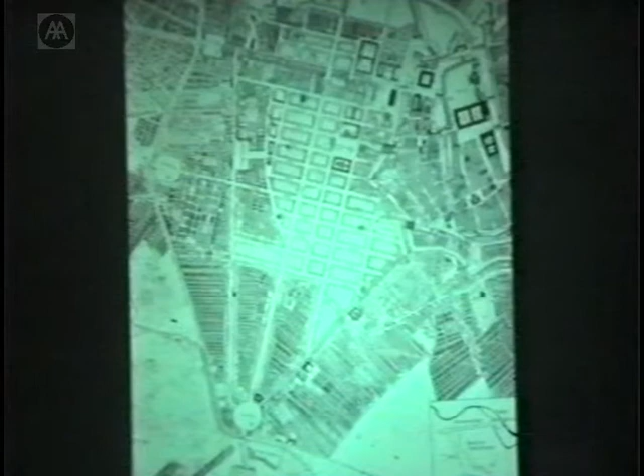Here is the southern site, a large triangular piece. Here is Lindenstrasse, which you notice has been curved from its original straightforward direction towards the Rondell in the Scharoun planning of Berlin and made to curve away from that concentration to become a kind of a highway.

That's Gerlach's building, and I should say that Gerlach was also the architect and the planner of the Rondell and of all the main geometric squares of Berlin.

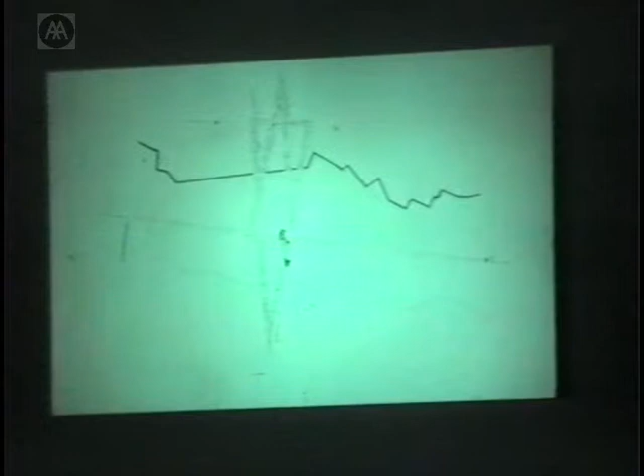That's the early model from the competition stage. In black it shows the courthouse, museum building, the zigzag, what I call the voided voids, which are the elements that have been extracted from this zigzag, and the E.T.A. Hoffmann garden. I call it the E.T.A. Hoffmann garden because E.T.A. Hoffmann was one of the lawyers in this courthouse presenting cases during the day, but as you well know, writing about a different kind of Berlin at night.

And to the south stands another important building in the plan of this museum, which is Erich Mendelsohn's metalworkers' headquarters. I propose that this shape become a garden in the future. There is here a one-story police station, so it's not certain how this will be developed. And there is the sort of three elements of the museum: the existing museum and the extension. As you see, there is no bridge connection.

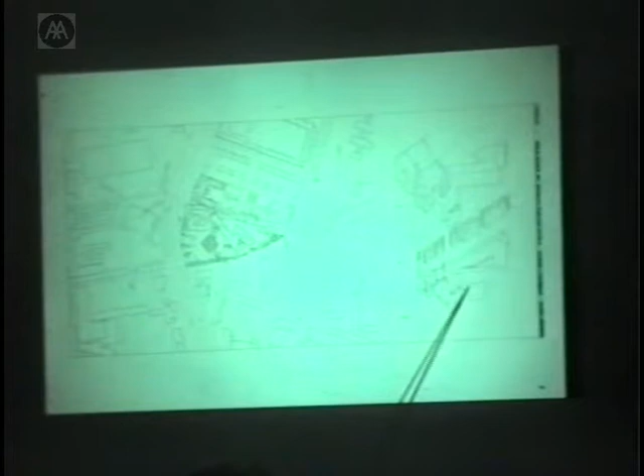And here's the underground with its kind of void placed in the building itself, leading underground to these three main axes. I said one axis leading to this dead end, the Holocaust tower, the other one leading to the Garden of Emigration, and the third, longest one, leading to the center of the building, which is the main stair and circulation system.

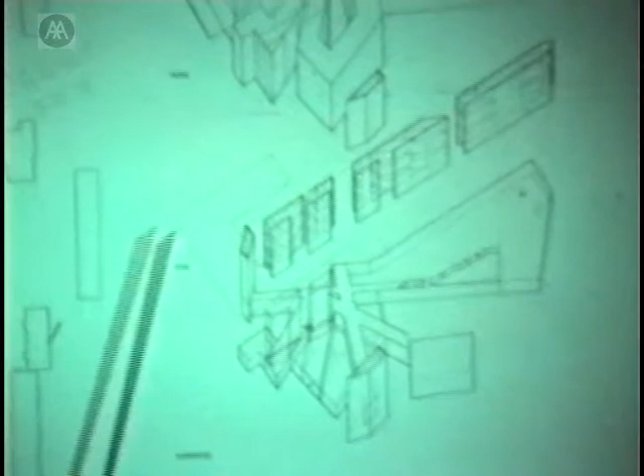I just want to say that the building has a kind of a doubling effect. From the outside, it looks very, very simple and has a narrative beginning and an end, thin and thick, and it's very, very strong and very easy to understand. But from the inside, it's completely different.

It's actually a building which is hard to contain and keep together as one building because it is connected by this slice which one does not see, since it is not a slice upon which you enter. It's not even a slice upon which you leave. It's that element of imaginary organization, which of course is there also physically.

And the building therefore has a very vulnerable organization on the inside, while it has a very simple and easy to understand organization on the outside.

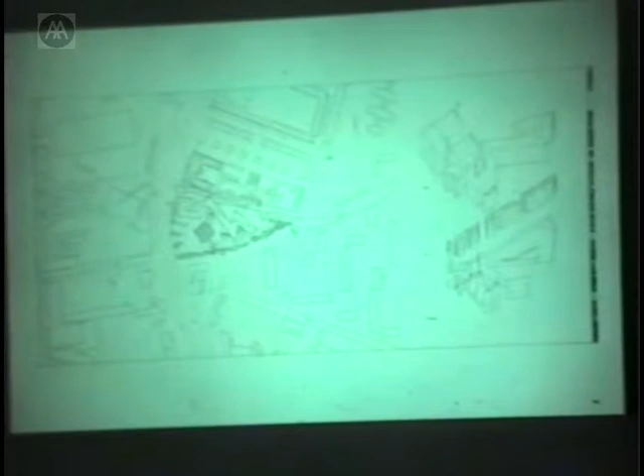And of course this is part of my own interpretation of Berlin history, that from the outside it looks very graphic, like it's something very tangible, but as you go into it and as the light dims on that history, one finds it more and more difficult to really find the pieces which belong together. And of course, the pieces which belong together are the pieces of the Berlin culture, which we can hardly find today because no artifact can tell us somehow how these conditions of life were mirrored in the city of Berlin.

So it is really a museum for the participant. It involves the participant in a particular way to reinterpret the history rather than to simply be a passive observer of archaeology.

This is a site plan of the museum. I just want to show again Mendelsohn's building here, the 19th century building, the housing projects east and west, the IBA buildings to the north, and the flower market, and so on.

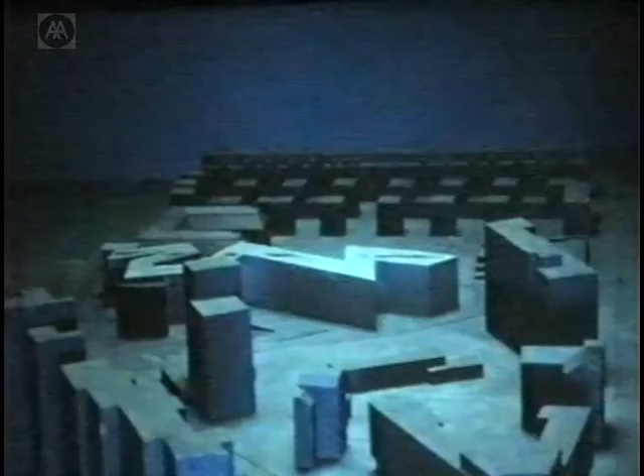View looking from approximately where the Rondell was. Today it has been totally built up by housing areas. And that is also an early model of the building.

I just want to point that the building is really many different buildings of many different shapes. There are buildings of this shape and buildings of this shape, and there's another one here, and there's a building like that, and there is a very small triangular building.

There are a number of independent buildings which are connected by that double wall of the void. And here are the bridges on different levels, and so on.

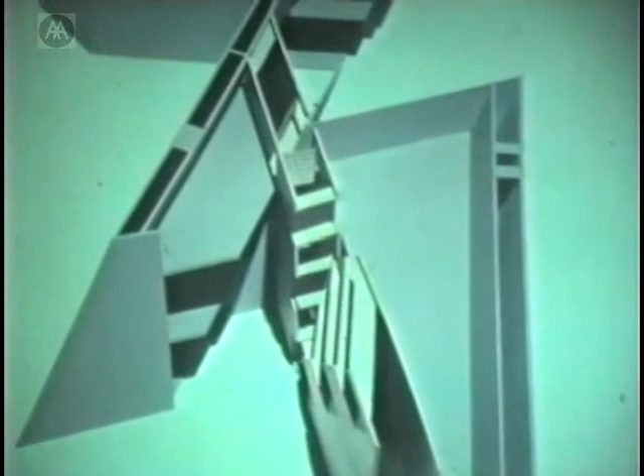That too is an important part of the building, that the void gives the building a kind of a backbone in order to turn the building into a fragmentation of many different buildings, each one having some relationship to, I would say, Berlin, both in its exterior and interior space, from sort of tenement kinds of buildings to large housing projects towards the east.

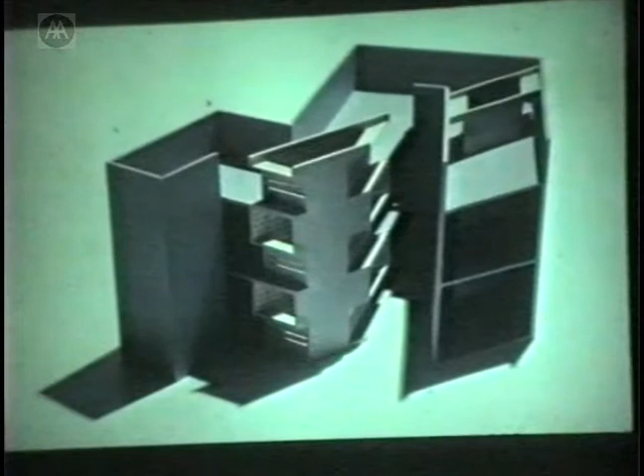And that, for example, is the first segment of that sequence of development, the first piece of that zigzag. And you see here along its upper levels, there's of course the underground, which is not shown in this model, but here is a small triangular building, here is the rest of the museum, here is the bridges on all levels, and here is the void.

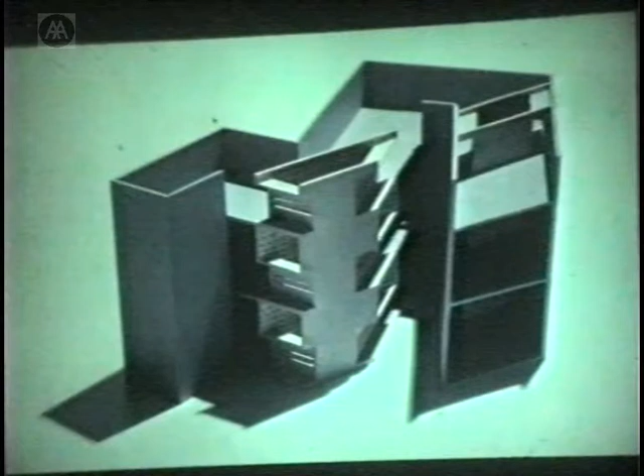And here is the second void, and so on. And the museum continues in this manner, but always from the middle, not from the beginning, because if you remember, you enter the building in the middle. You don't enter at the beginning or the end. You enter in the middle, and you have by that time traversed a large underground space.

That is the underground. I'm sorry, the slide doesn't seem to be very good, but you see the southern wing of the Baroque building. You see there a bit of that void in that building, and this is the main line of circulation. That's the beginning of the staircase.

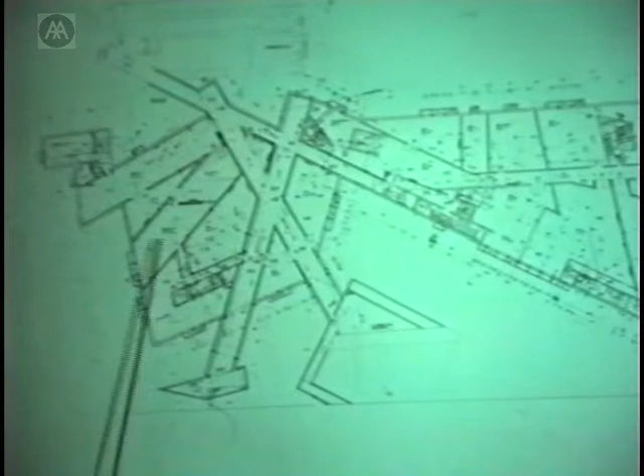The garden, the voided void, the religious collections of the Jewish community in Berlin will be shown in the underground. There was a very ancient community, one of the oldest in Berlin, here. There are other facilities in the underground, other bits of the museum, also storage and other parts, which are also accessible to the public in part.

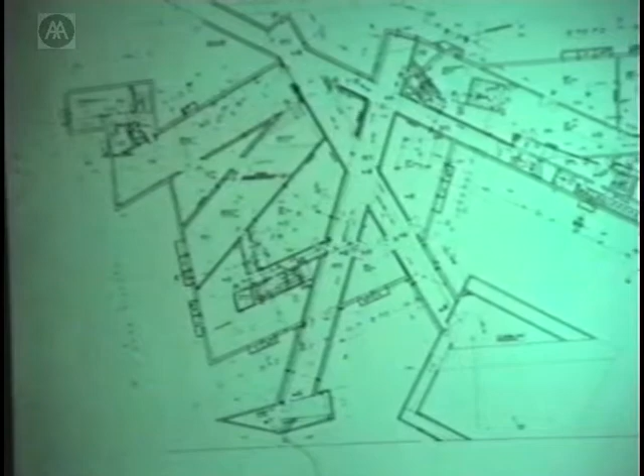That's the underground. Now I have to show you a number of different kinds of things because I have found that it is not an easy project to explain, because it's one of those projects where the plan has no relationship to the spatial experience. I want to emphasize this. Usually plans in architecture are simply projected into the spatial experience. In this case, because the approach is thoroughly emblematic, the actual plan doesn't really give you what you will feel.

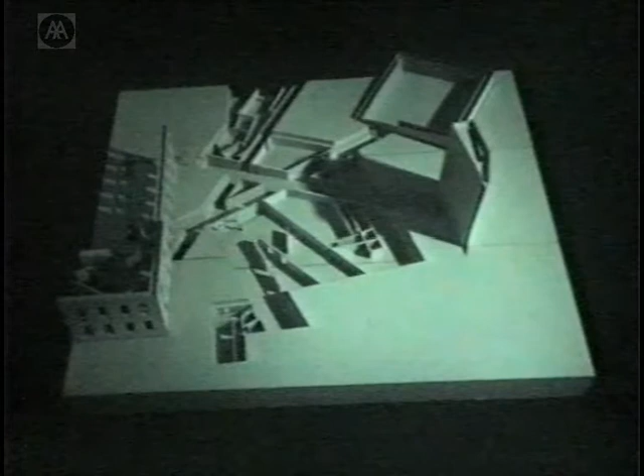Therefore I have made maybe more than 60 or 70 different models, site models at 1 to 200, 1 to 500, to actually a one-to-one piece of the void and piece of the underground, which was recently built in the Berlin Museum as a kind of experiment to test materials. So please bear with me if it's not completely transparent.

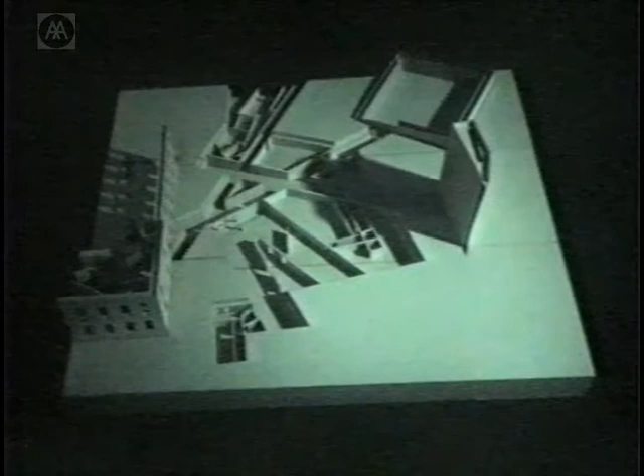That's the underground. The entrance, the main entrance of the Baroque building. Here you go down. You go actually underneath the foundations of the Baroque building. And as you perhaps know, the buildings in Berlin are built on water. There's a lot of water, sand and water.

And here when you go down, you see that you kind of see the geology of Berlin. You see that it's really floating. And you go underneath this foundation very deep, 8 meters down, and you come through this axial system. There is that religious collection.

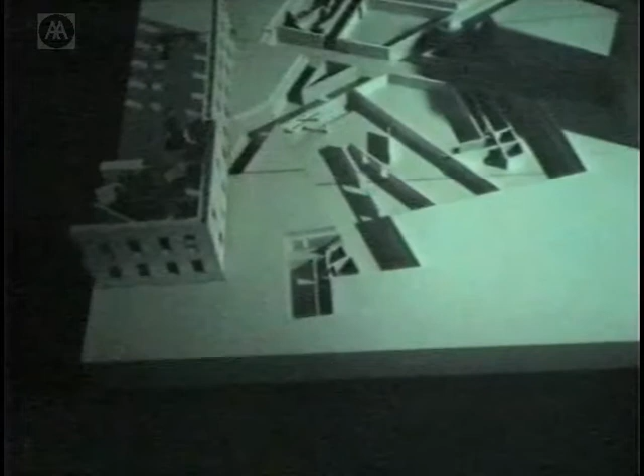And I have to say that on the underground, the zigzag breaks itself into pure forms. I call it the buried constructivism of Berlin. Because here on the underground, the zigzag can actually be experienced as a set of pure volumes, just lines, which upstairs are connected, and therefore one doesn't see those pure elements any longer. So they are experienceable as pure lines in this hidden zone.

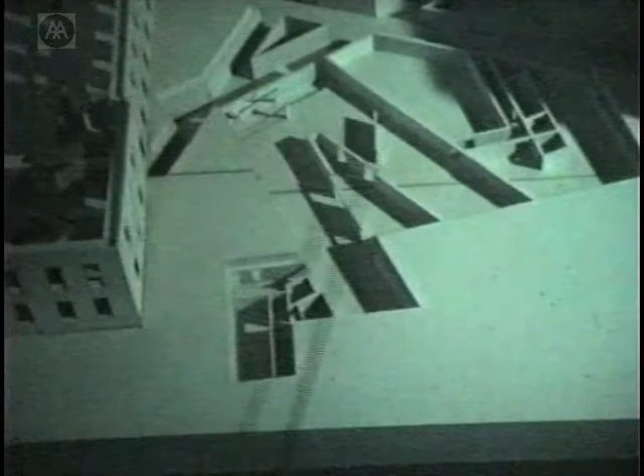And here are the traces of the voids which go all the way up about 22 meters high, and the axis. And there at the top of the slide would be the beginning of the main staircase. And that tilted form is the garden, the E.T.A. Hoffmann garden.

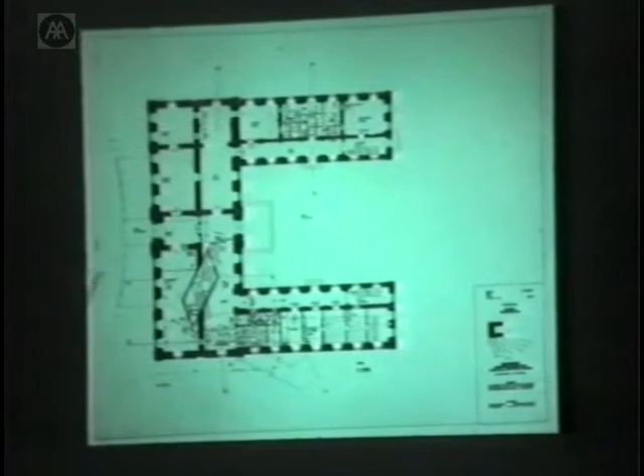The Berlin Museum at present with this form, the entrance. That was, by the way, programmatically part of the program to make the Berlin Museum, to restore it as much as possible to become an important building.

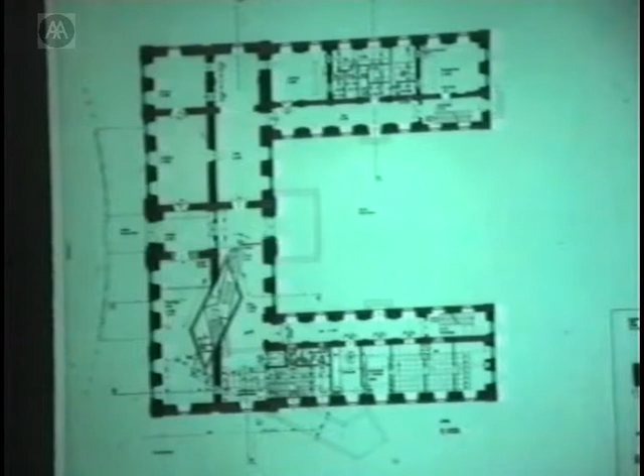And I actually proposed to restore its symmetry, although I inserted this large form into it. But it was reconstructed after the war in a not symmetrical way, and I proposed to reconstruct it close to what it was.

Going down and in section, you can see here, you would be able to view this level here. And at this point begins that labyrinth.

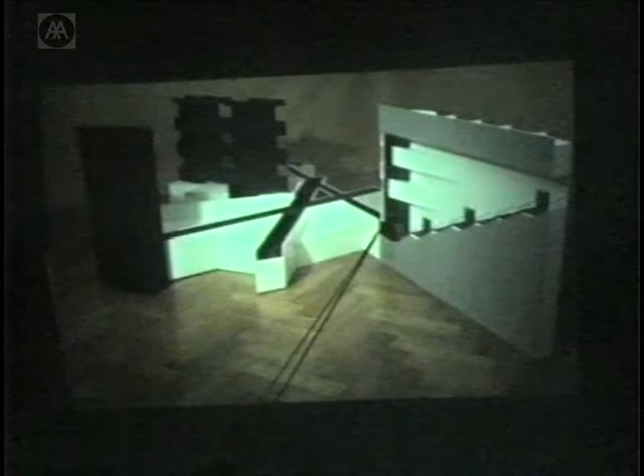Okay, going down. And that's another model just to give you a relationship of these voids in the underground to the main circulation system, which is here. That's, if you can imagine the zigzag going like that, that's the middle of the zigzag, and it keeps going this way. And that's the exact geometric middle of it, where you are on the staircase, and there are the different exhibition levels.

Here is a construction of the two voids, and the reversal of that void, you can see this is the positive form of this negative absence. The one going here, the one going here, and the garden would be here.

There you perhaps see clearly the religious collections, or whatever remains of them. Actually, what remains of them is very little. Don't think of religious collections as being some fabulous museum of artifacts. It's just a few menorahs and really things that would never give you the idea that almost 200,000 people, very actively involved in the city, actually were part of the city.

So it's not so much about the object, it's about, in this particular section, the display actually of the tombstones which were extracted from building a U-Bahn station in the 30s. They actually have been preserved, and I found them, and that's part of this museum.

And here you can see the scale of these voids, and there are 6 of them in the museum, and they are different in size, length, but always the same in height. And you can see the bridges, which you would experience.

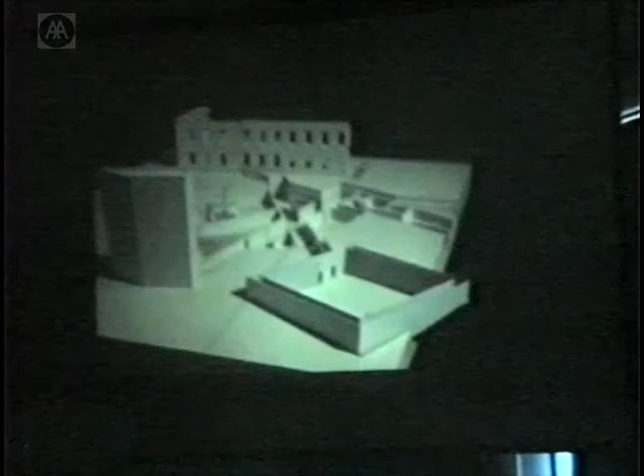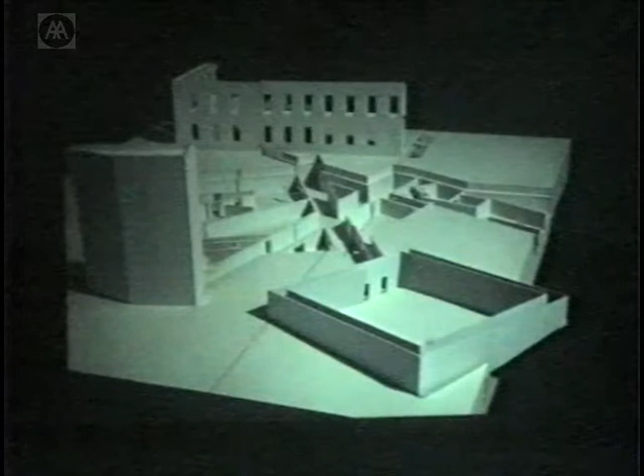Yes, maybe this is easier. That's a view from the south, looking towards that underground. I would say almost a third of the building, at least in cost proportions, is underground. It's difficult to build underground, but this building has a very vast foundation. On the outside it looks fairly thin, but on the bottom it's substantial.

This is what you would see when you had gone a little way into this axial, into this kind of triangle. Here is that main stair. Here is the axis towards the garden, and here you see the lighting system reflecting that longer axis, which leads

to the dead end. Programmatically it's important to know that there is a kind of order here, but it's an order one must find, because it's also conceivable that some people, seeing the light of the garden, will move towards it as the main space, when it's really just out again of the building. Others might take the transversal axis, which leads to a volume, and still others might take the staircase itself.

I've tried to minimize any disorientation in the building. However, I have to say there is an element of vulnerability in this building. It's not all given in plan, and even if one would give it in plan, I think people would still sometimes return, sometimes involuntarily, into the system of geometry.

That's just to show you where the photograph was taken, approximately from this point here. This axis is still going back there, and we were looking at this, and the lighting of this axis here, and at a bit of this frontal part.

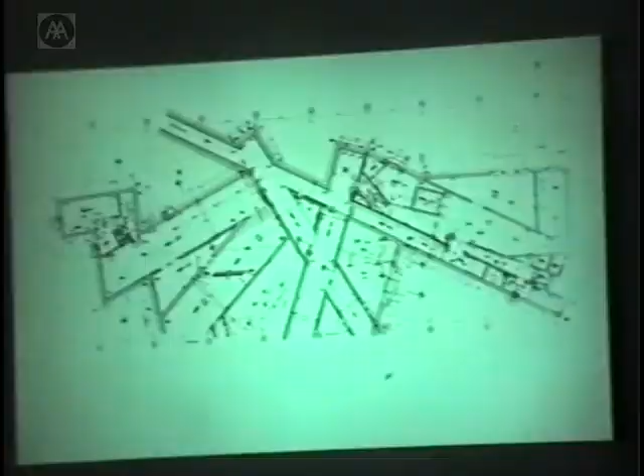That's another axis, and on the right is the opening to the Jewish Museum. When you enter this museum underground, you see partly here the void, that black line. The void is actually accessible in two places in the museum, in the two underground spaces of the religious part of the collections.

There, and it's the only time, you can see the full organization of that volume. Everywhere else there are slits and cutouts, but one can hardly look into a dark mass and know what it is geometrically. The material of it is graphite, so it absorbs light.

Even the names which are in it are not really completely legible, because you can't read that many names. I was interested to find out how much those thousands of pages of volumes would take up if you were to just cut out the pages—an incredible amount of volume. These two volumes, approximately this thick, don't even fill two 22-meter high volumes, which are sometimes 10 meters wide.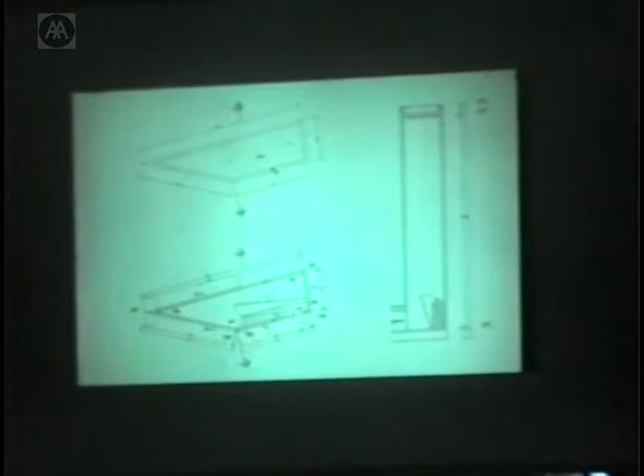That's that void. And we entered through here. Through here. The stair.

And now looking from the opposite side of the garden. And now the garden is these pillars, these 48 pillars of salt. But they are not made out of salt. But they relate to the mines of Falun as they relate to Jerusalem. And they are proposed to be built in this gray-white stone from Jerusalem.

It's a kind of a very full building volume which confronts you on a very oblique angle as you leave the museum from that particular route. And here you perhaps sense the kind of space. It's a labyrinth without any interior to it.

And here we rejoin again the access towards the main staircase, getting closer to it in plan to the center of the building. And now you're up on the staircase, and there are these levels, the temporary exhibitions level, which will house temporary exhibits of the Berlin Museum, and the other two levels of the museum. And upstairs is an administrative level which contains reading rooms, archives, and offices.

In section, the main entrance to the building, the entrance to the underground, this tilted plane, and I have in no way to explain this, but this entire trigonometry of these axes lies on an oblique plane, which is very, very disturbing. It's not oblique by a lot, it's only a few degrees, but you really feel, I think, and as I explained, we have just built part of it at 1-to-1 scale, approximately the size of this room.

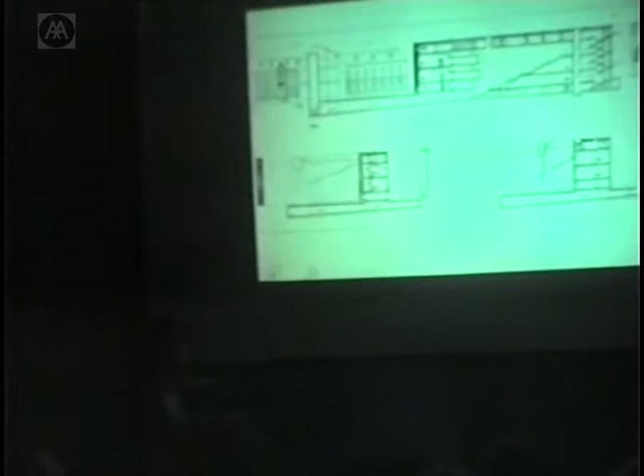And it verifies, I think, what I tried to do, which is to embody in it a thought of Franz Kafka, which is that the most dangerous space is not the space which is high up, but the space which is approximately 4 centimeters from your foot. And he says that's the space which really trips all concepts. And I thought that this plane, it's about a 4 centimeter slope, gets you to these voids here.

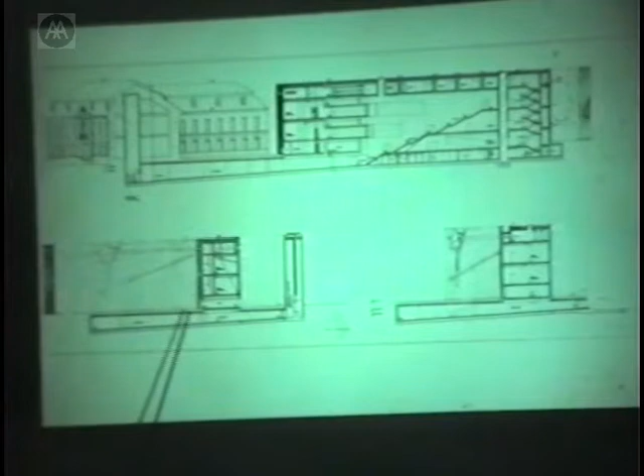And here you see in elevation, in the cutouts, those recordings of what I call the intermarriage of Berlin. And of course the marriage, I don't mean it just in an alchemical sense, but the marriage, the intermarriage between Jews who thought they were Germans and Germans who thought they were Jews, is part of the essential ambiguity and tragedy of the history of that city, and of this city, of any city, but particularly Berlin.

And this assimilation is constituted in the lighting system of the windows. So what appears maybe a little bit crazy from the outside is a very important, at least to me, principle of organizing and making sense out of vanished relationships and vanished physical ambience, which you cannot see by the window or by looking at a monument or a street.

That's the stair, and I want to say that only where the main orientation occurs at the stair do you actually see the contradiction between such a void and such a continuity.

Can I press the next slide? Yeah. Can I press the next slide, or? Did that slide not want to be? I'm sure there is a slide. Okay, but don't worry about it. I can just skip it. So shall I? Fine.

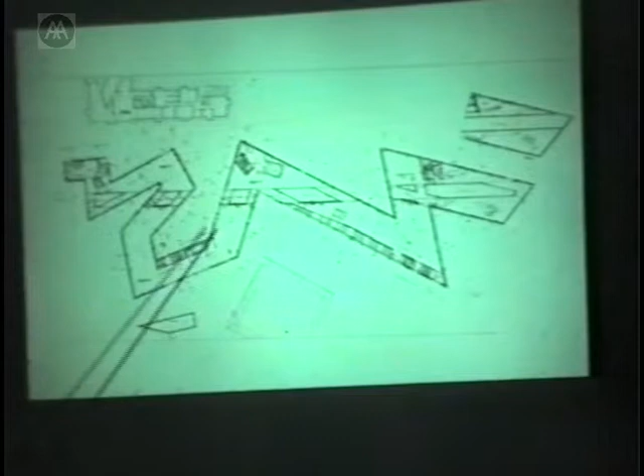It's a typical museum floor. Elevators, staircases, and so on are basically freestanding objects within this. That's the line of circulation. The other, just to see what that void looks like in another plan, and so on.

And that's what it looks like. That's one part of it, that middle portion. I just want to illustrate what it looks like spatially with its elevators.

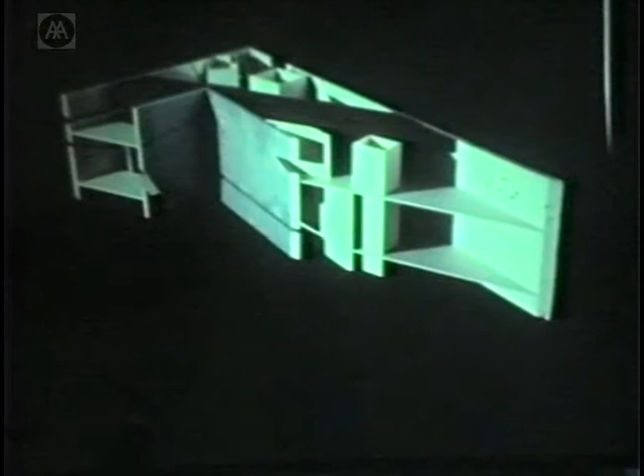You can see that this double wall has a very big impact on the building because, first of all, the entrances to this double wall, which is the wall of the void, are always symmetrical. It's the only place in the building where there is a left and a right. Whenever you come to it, you have a left and a right, and you have a kind of continuity in the form of a mirror.

And the rest of the museum spaces always have one blank wall, at least, and one angle. I thought programmatically that these conditions of looking at the Berlin history from an angle towards a wall which is symmetrical were important. So in each space, you're always looking from an angle of some shape towards a symmetrical entrance-exit situation.

I should probably describe that this is not a concept that is just whimsical, but has to do with what kind of exhibits this museum has. This is not an art museum, not the Museum of Paris or London, not a museum of a normal city. This is a museum of a city which has the most amazing and schizoid, hysterical history, which cannot be shown in any other simple way, but I believe by putting the museum goer exactly into those conditions without simulating them.

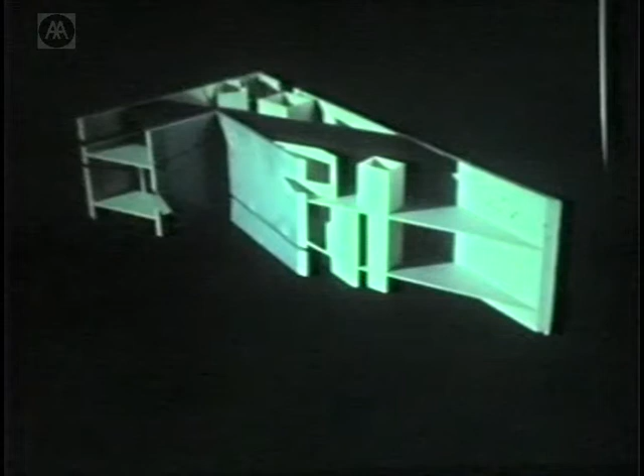So, for example, if one was to display a painting by Max Liebermann on one side of the void, on the other side of that same wall, on the inside of it so to speak, one would see the suicide note of his wife, written from a concentration camp in 1940. If one was to show the books of Walter Benjamin on one side, then one would show the missing manuscript of Walter Benjamin's, which he lost somewhere in Spain.

If one was to show Schoenberg's notes for Moses and Aaron, one would have to show on the other side of that music the survivor from Warsaw. So all of this doubling has to do with the fact that I believe no Solomon can actually divide the Berliner into a German and a Jew, since it's not possible to divide them along any line of geometry. They have coagulated and therefore can only be separated through negativity.

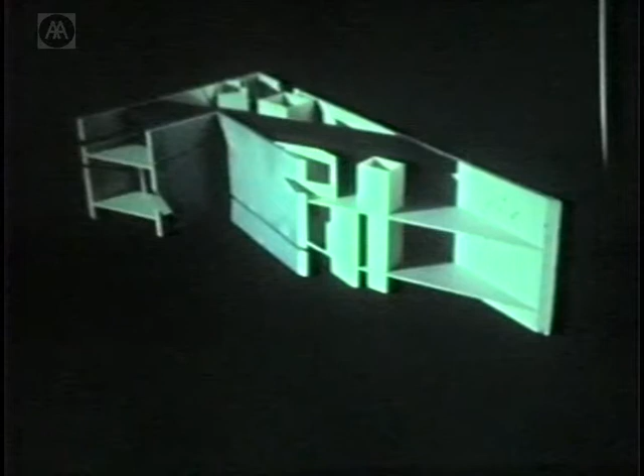Of course, one can say that Walter Benjamin becomes a Jew and is no longer a Berliner when he gives the manuscript up and commits suicide, that Max Liebermann is no longer the head of the academy when his wife begs for permission out of a concentration camp, or where Arnold Schoenberg renounces his conversion to Protestantism and becomes a Jew once again.

That's really the mission of such a museum: how to show a history in an integrated manner, not in a segregated manner, not in a manner which would put the Jewish Museum somewhere as an ethnographic museum of a missing people, of a lost people, but would show the continuity of that history and the power of that history within the emptiness of the contemporary state.

And of course, that is just a small aside to why the museum has this particular set of organs. That's just a walk between two voids along the porcelain line. And that's the porcelain Hof, the porcelain courtyard.

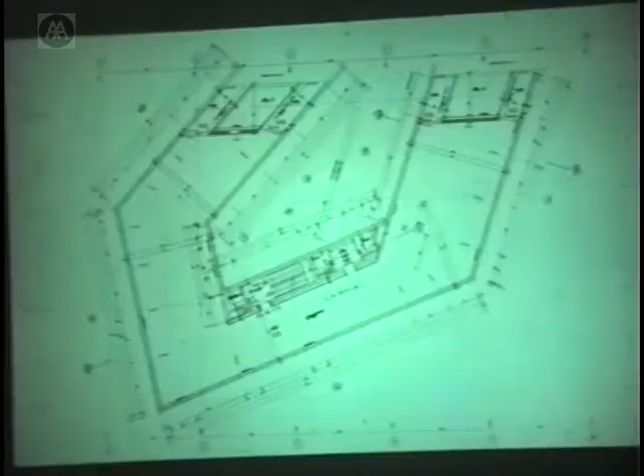I would just like to show you what it would feel like in this particular segment of the building. That's the first piece along that line. Second piece, you go around. Third one, you become aware of the void, or of the wall, the black wall in the back of this white museum. The museum is in three colors: black, white, and gray, basically.

Then you get closer to it. Well, something is wrong with this. But can I just go on? Yeah, there was one more. Now, can you go back to that section? No, don't worry about putting the slide back.

That slide which was missing, which somehow is not wanting to project itself, is the slide where you would get the symmetry of the doorways on that black wall, where you would get a complete, very simple left and right, which is a kind of the geometry of the return. And here is the return as it appears in sections.

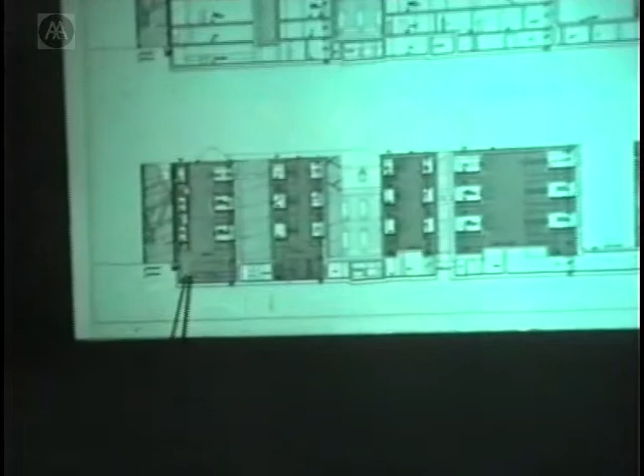These are what I would call these other kinds of buildings, these black buildings, which are also structurally supporting those other shapes. So 1, 2, 3, 4, 5. These buildings, I wouldn't say they are negative buildings, but are actually the positive sustaining of those apparently eccentric geometries. And these are the bridges in section.

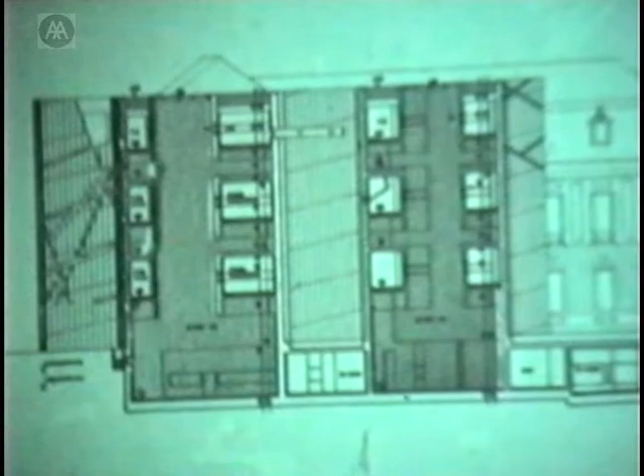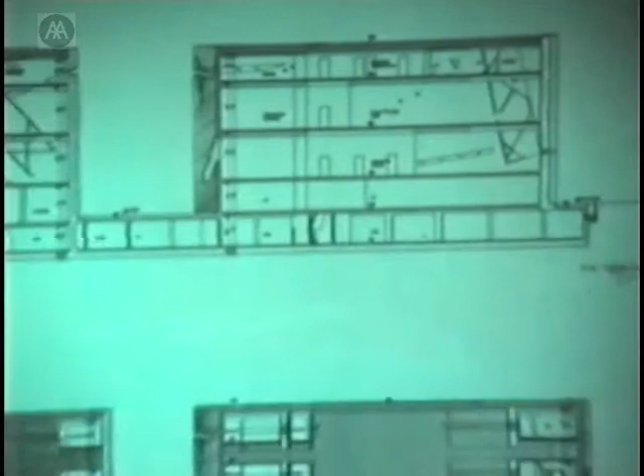The numerical and numerological aspect is very important in this museum. I don't have time to go into it, but I did try to interpret both Walter Benjamin and Schoenberg in a certain numerical emblematic tradition. That's why the museum has 24 elevations, 177 windows, and so on. Some people ask whether everybody will know about it—probably not. But that wouldn't invalidate the fact that I sought to make the museum an interpreter of these texts rather than be interpreted by them.

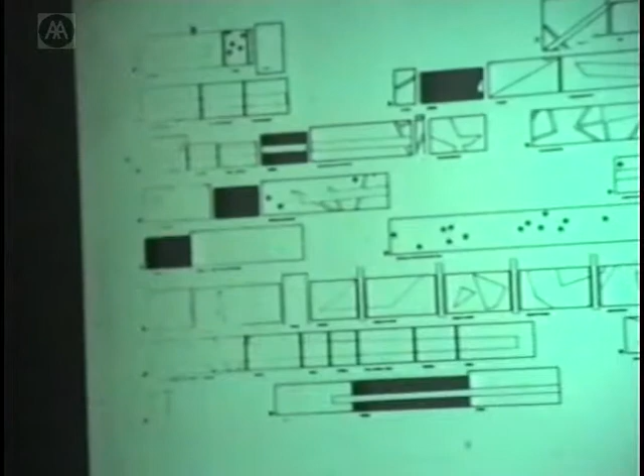That's, for example, how on the administrative level the rhythm of void, window, and blank wall would look. That's just a portion—I have many of these drawings which I don't want to bore you with. That's the last void, void number 6. It's the longest one, and again it's accessible in a different way from the first two, from the temporary exhibitions area.

Here I think you see that it's really a building in itself of some substance and some cost. This is an important factor, because who wants to pay for a void? When it comes to money and budgets, the most important thing is to convince somebody to pay for nothing. But I have to say I got my courage to do this.

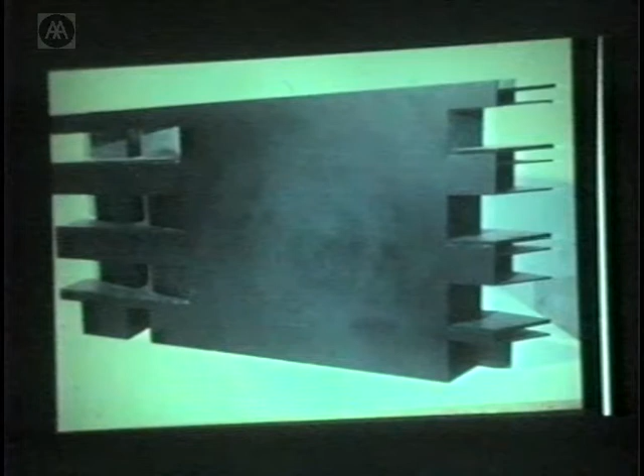I would never have been able to do it without my wife Nina, who helped in the political argumentation. But I have to say Wittgenstein gave a very good example of it. He said that nothing is not really nothing—it's a word. And the minute it's a word, you can use it as a linguistic piece of analysis. So I used the same logic.

I said the void is not really nothing, because of course the Senate of Berlin said the void costs so many millions. It's all this cubic volume of space which is being built, and no one will ever know it's there—it will be just as much of a void if you compress it and make it into nothing, just call it a void. But I said no. Arguing in a Wittgensteinian manner, I said that in architecture, the analysis of that physicality would really show it's not nothing—it's really a third of the architecture.

And I was lucky that people in Berlin also understood that this is not a conceptual museum.

That's how it would look passing across one of the bridges, one of the many, many bridges. They're all different—if you looked at the plan, they have different shapes and different lengths.

This is a slot, a cut of space. I also added a small cut on the bottom for kids and for people who cannot view it at that level. It's interesting what you would see, because I cannot describe it exactly, and I don't have a successful photograph of the one-to-one model, but you see something that looks like it's not there, but looks very far away from you. That's the impact, because it's in fact very close.

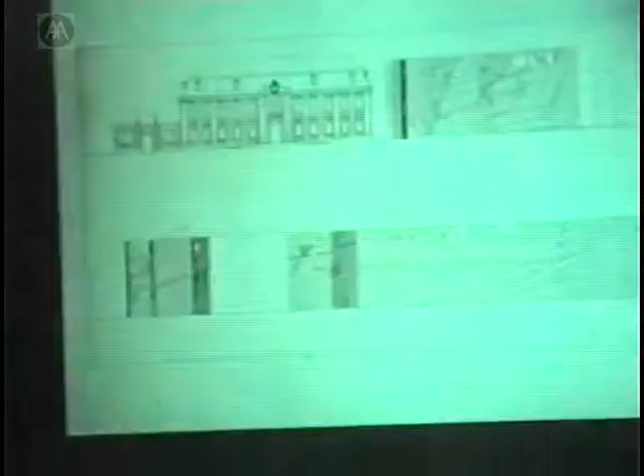And that's the elevations. This is the elevation looking from Lindenstrasse on the upper side, and elevation looking at the voided void here from the south, from the Mendelssohn building, so to speak. And the cuts, angles of the different parts of the building.

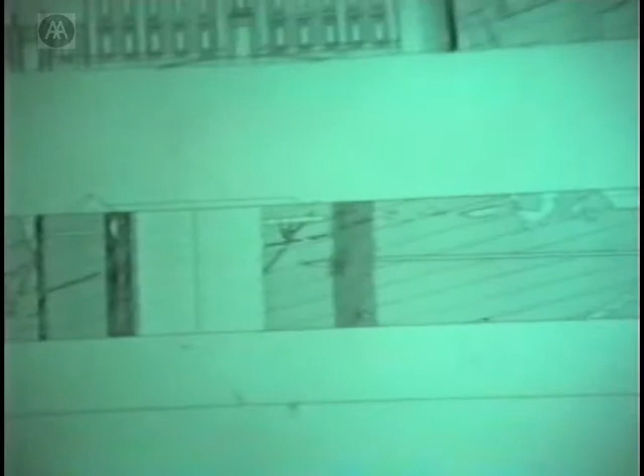I should mention that this line of absence, or line of inaccess, traverses all different exhibits, because the museum is not only a painting museum—it has large collections, the largest collection in Berlin of textile and fashion. The garment industry was one of the biggest businesses of Berlin; before the war, many of the leading protagonists were Jewish businessmen and Jewish tailors. There is also a large theater and cinema collection, which includes paraphernalia, manuscripts, and so on. There are toys, articles of everyday life. It's a mixed, very strange museum, because it's itself a product of an accident of what survived.

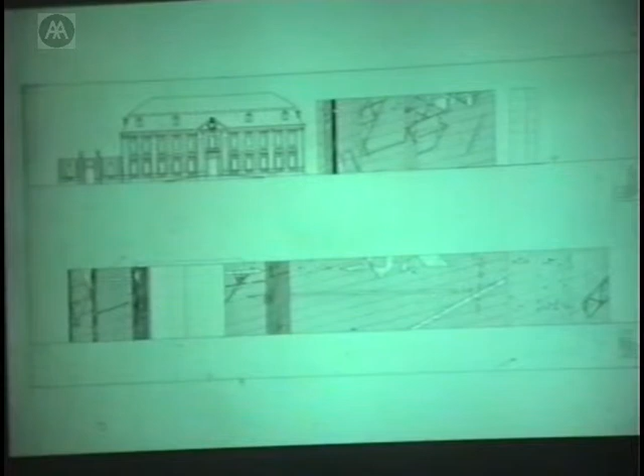These are the elevations from the east and from the north, again marking this invisible interconnection of basically names and numbers.

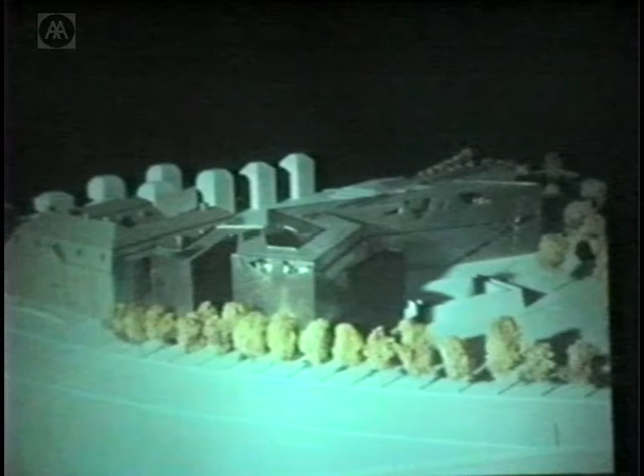And that's a view from Lindenstrasse, with the IBA buildings in the north, and these are the existing trees which have all been kept. I've kept as many trees as possible within this configuration, because it's part of a kind of green zone for pedestrians and bicycles, connecting Kreuzberg and other parts of Berlin. It's a view from the housing complexes.

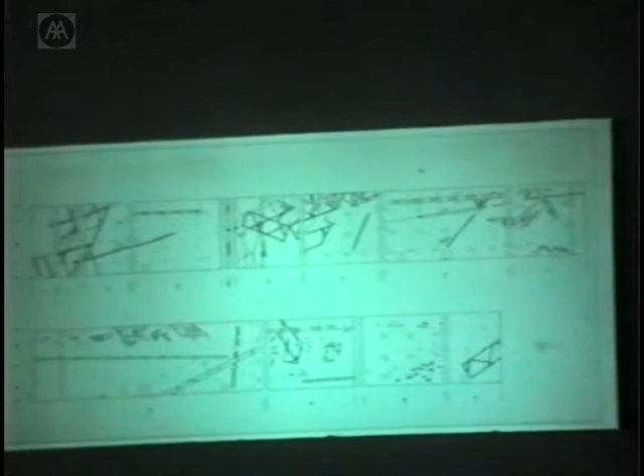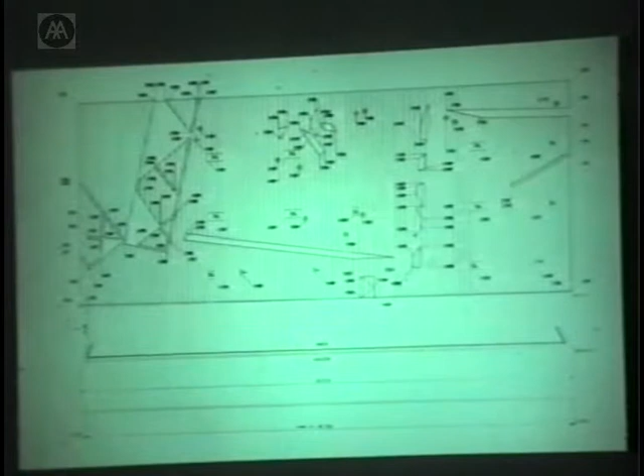That's the unfolding of the windows from the south and from the north. But I just want to say that it's not just about leaving traces, it's also about making windows, which bring in different kinds of light. To be aware of that light and the constellations of that light is very important to me.

These windows open along different levels, and they are open and closed permanently along these lines. So if you stand in particular places, one would see what initially appears very irrational — looking at a bit of a cemetery on one side, and on the other side a particular window of a housing project, or an open territory where the flower market is in Berlin, and on the other side small streets that remain between these other houses.

And one is actually looking, and that's what the museum is. One is looking, and also one is lighting, illuminating the particular exhibits within this range of obscurity, because programmatically the museum is not supposed to have a lot of light. They didn't want a lot of light.

But I thought that light should enter along specific angles. So again, the light, like the form itself — from the outside the building is zinc, cut in on a diagonal. The windows are cuts, diagonal cuts through the building, slivers of planes which in an imaginary way penetrate through the person. But on the inside they are fractured. So that's the window from the inside.

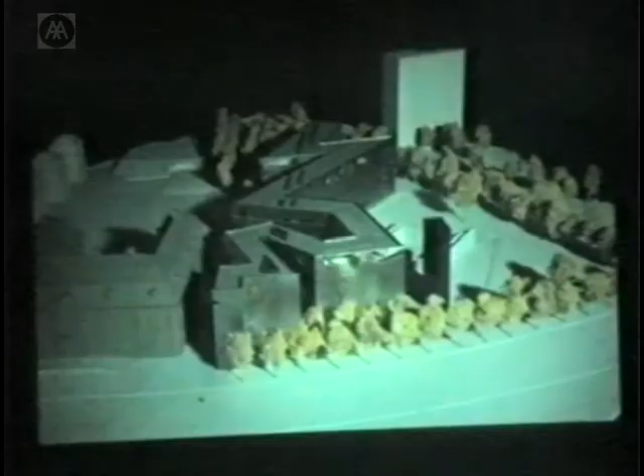Again, from Lindenstrasse, that white building just gives you the scale of these vast buildings that continue behind it. And that's the view from the Mendelssohn building.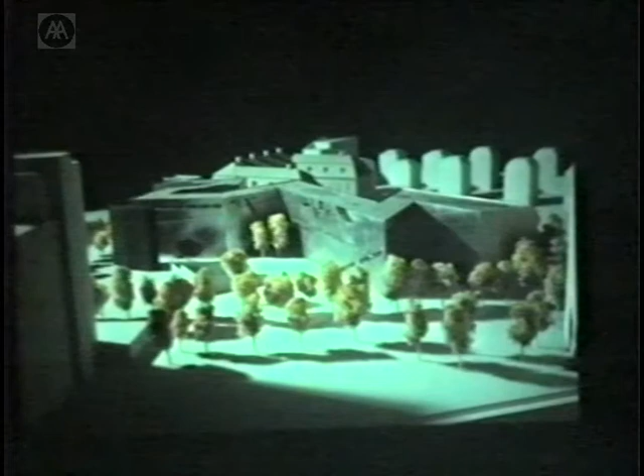I always thought this was the front entrance to the building, although I designed the building before the wall, and the main station was at Mehringplatz, at the Rondell. I knew that architecturally the building is really set up — the Baroque building is set up by Schinkel's geometry — to become the object. So I only bracketed it with this very narrow tip of the building, which also contains one of the main staircases between the exhibition levels.

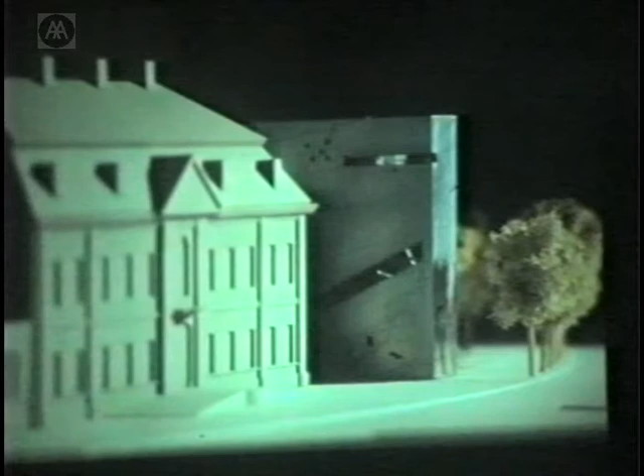I guess that's really my interest. That's where I started, and that's where I'm still working on the project. I started with the name Berlin. I don't know whether it appears — it does appear. Berlin and Berliner seem to have covered an incredible number of pages. Somehow Jews adopted the name Berlin and Berliner en masse, more than even the name Schiller. Jews took the name Berliner. I started with it, and somehow I believe that the museum is about the names, about the fact that the names don't do anything.

Thank you very much.